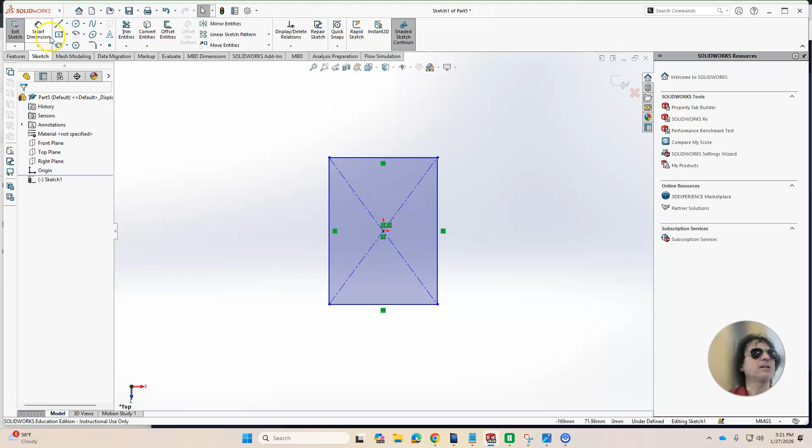So let's demonstrate this and the difference between the regular extrude and thin feature extrude by making one rectangle. Let's make a center point rectangle on the top plane, and that rectangle I'm going to make to be, let's say, 40 millimeters by 80. Let's practice in the units of MMGS, so by 80 millimeters. And I want to extrude the thickness of 10 millimeters inside of it.

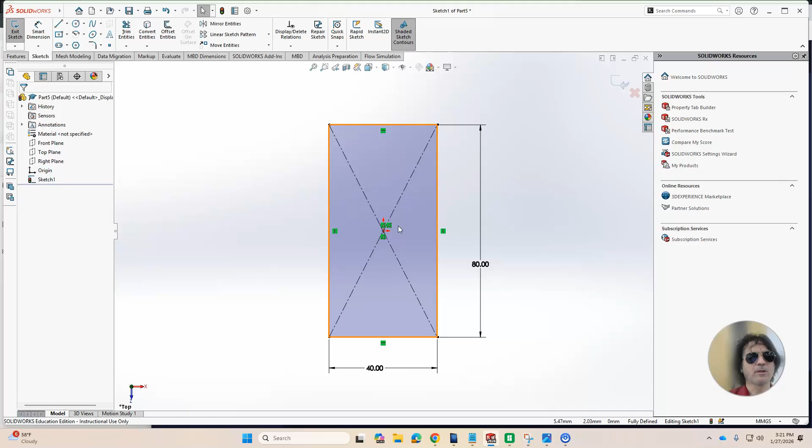So the typical workflow for the beginning SolidWorks user will be what? There will be two. Either draw another rectangle and then extrude the midsection, or extrude it out and then draw another smaller rectangle and cut it out. Well, we can save ourselves a lot of time if we use the thin extrude. So this is how it is going to work.

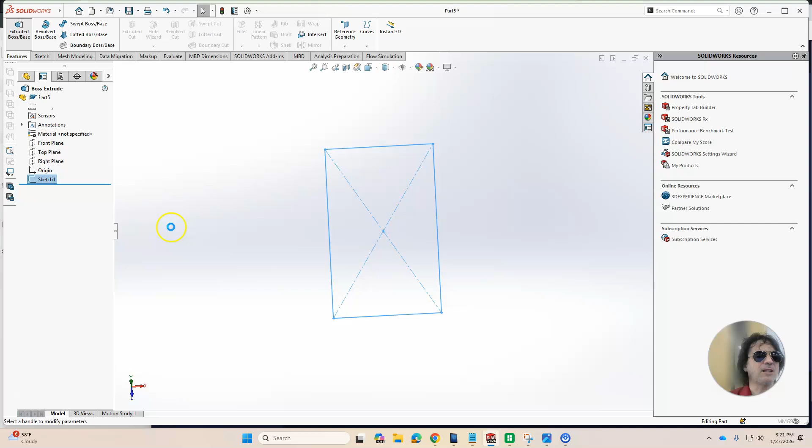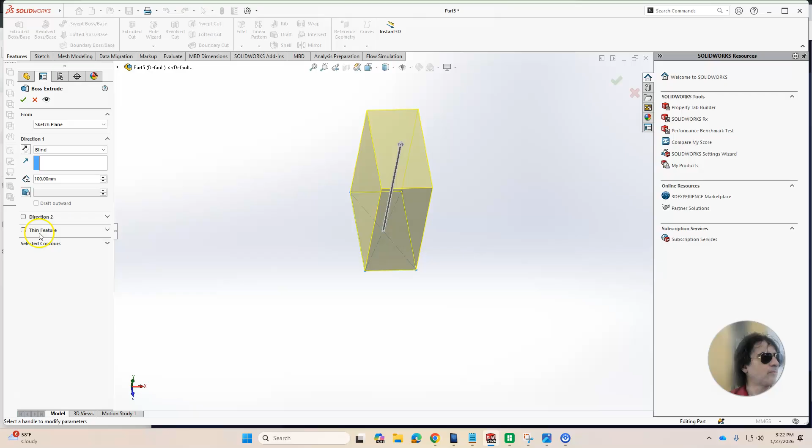If I choose the feature Extrude Boss/Base, by default it will do a thick extrude, let's say for 100 millimeters, and it will just bring me this brick, and all of you SolidWorks students know that's what we do in the first classes, our first part. However, there is this little known box here which is called the thin feature. If I check the box here, it will open this little panel and it will create a thin feature. And look at this, the thickness of the feature is 10 millimeters.

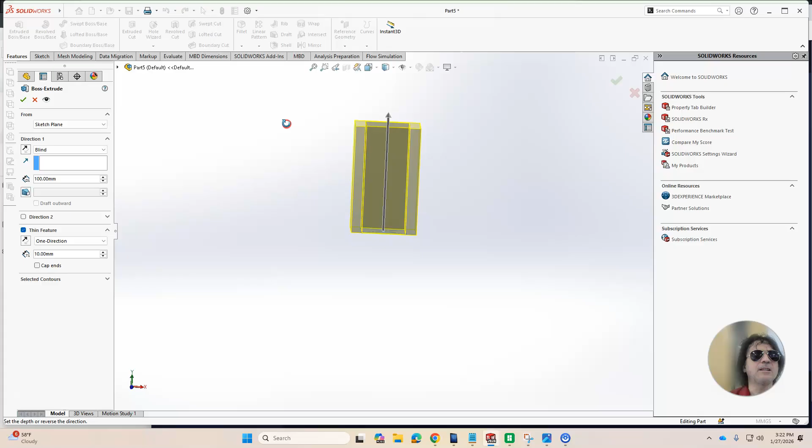So it put, in this case, 10 millimeters, and it was on the outside of my contour, which is the default. If I want to switch the 10 millimeters to be thick on the inside, then I will need to click on the thin feature arrow, and look what happened. Now this is inside, and let's say that I want to keep it inside.

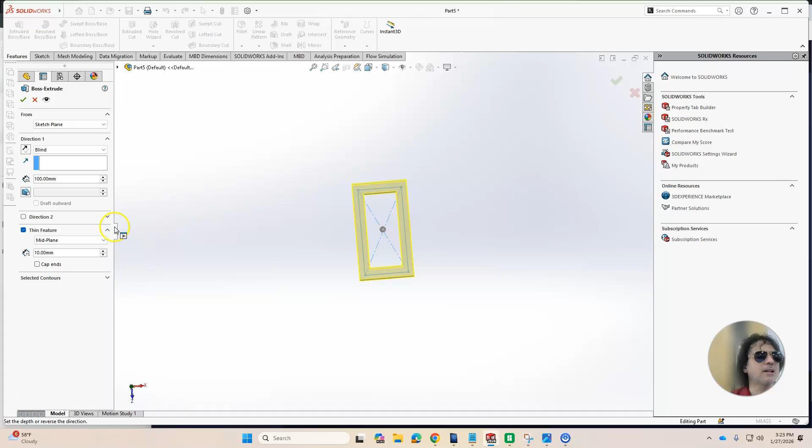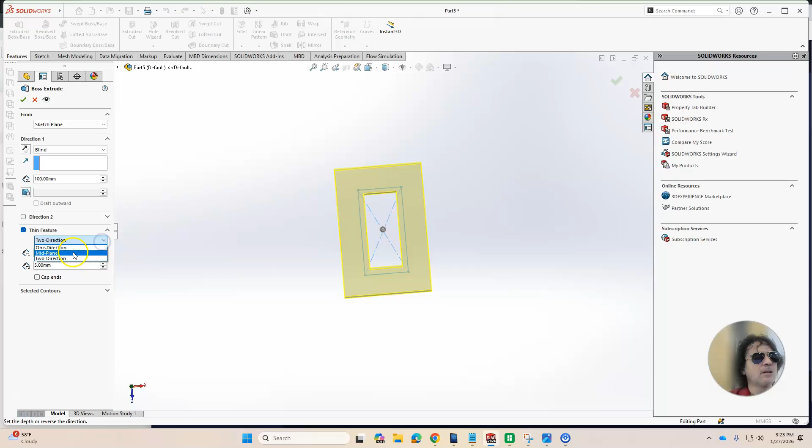Another option that I have is to have one direction, which we are doing by default. We can also have a mid-plane. What does mid-plane mean? That our contour is the center contour, so it's 5 millimeters on one side, 5 millimeters on the other side. And we also have two directions, which will be not symmetric. So let's say that we want 20 millimeters from one side and 5 millimeters on the inside, and you can see how now it made the asymmetric wall. So those are the options here.

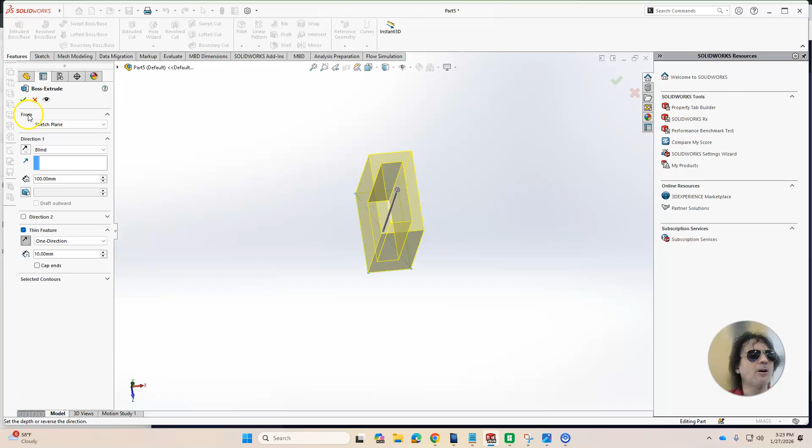So it allows us to build our parts much faster, and it helps us to make a more robust, more compact and more parametric model. Alright, so if I put this thin feature of 10 millimeter thickness towards the inside, outside versus inside, that's what we are asking in this exercise, and I click OK. Here is my piece, so I saved several operations into one.

Another option that I have here is to cap the ends. And what does cap the ends mean? It means to cap the ends with end caps, and it also has a thickness of the end caps. Let me see if I put like 10 here. Look what happened. It created 10 millimeters capping of the ends, and it will always cap towards the inside. So the outside is always whatever your length of the extrusion is.

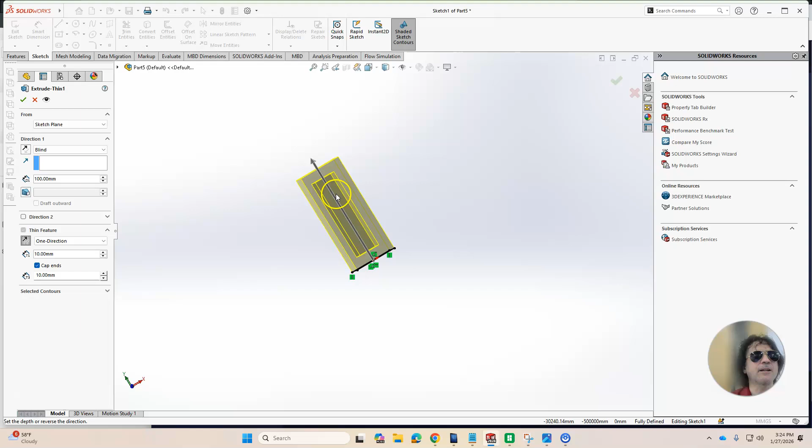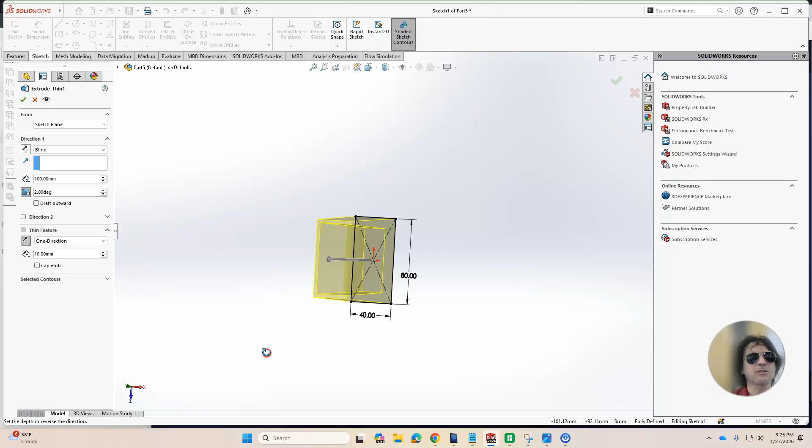This also works with a draft. Let's say that we want a 1 degree draft, for example, or 5 degree draft. 5 is too much, let's say 2 degree draft. So as you can see, we can actually create a drafted piece this way. Awesome.

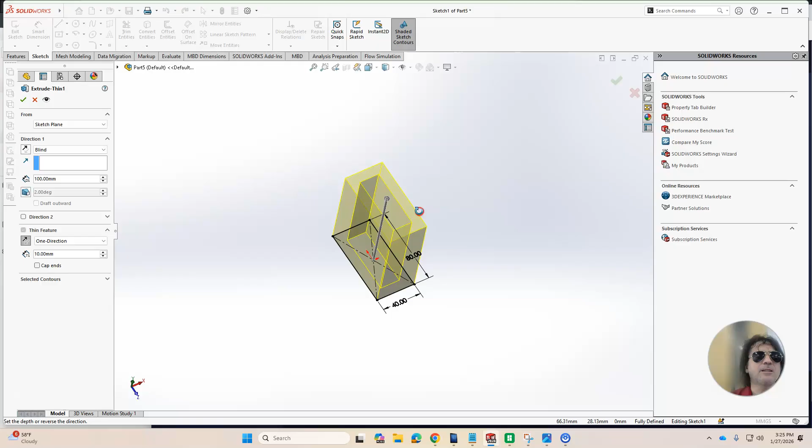Okay, so this will complete this exercise. Now it's up to you to repeat the exercise and make the piece. I'm going to take off the draft also. So this is your piece that I expect you to make: 80 millimeters by 40 millimeters, height 100 and wall thickness of 10, by using only one rectangle sketch and one extrude feature.

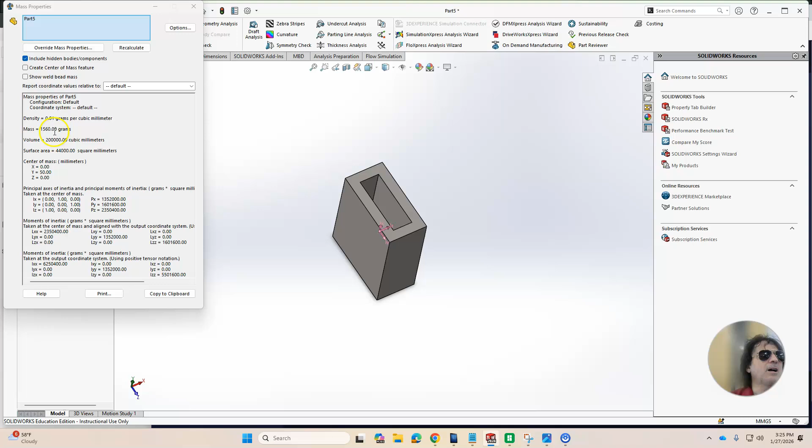And let's see how we know that we are correct. If you use plain carbon steel, and if I use Evaluate Mass Properties, the mass should be 1560 grams. Thank you for watching, and let's try this exercise now.